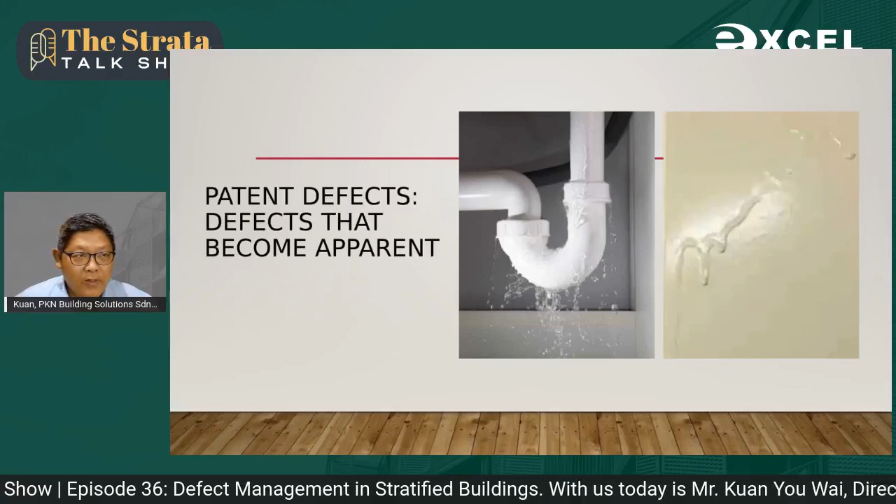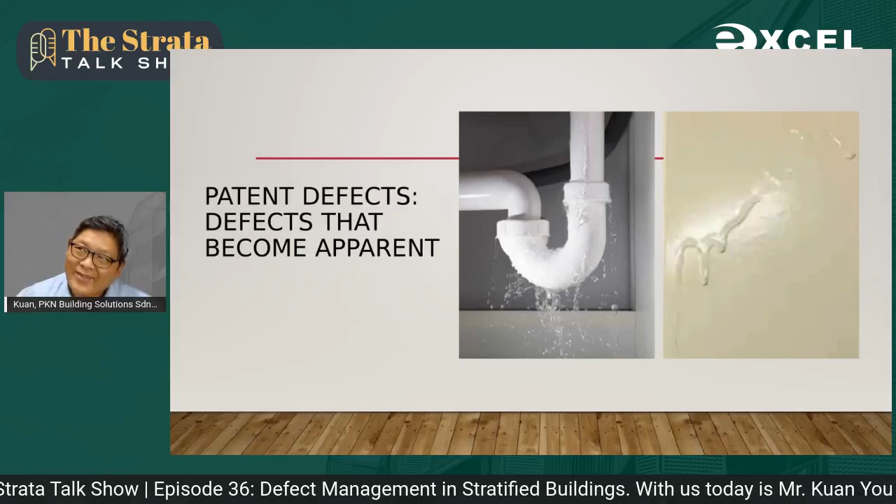Okay. Bear in mind, when you take your building during the vacant possession, the building actually comes with visible and invisible defects. So it is there since the first day. You need to understand this concept because some people misunderstand that during DLP we are only concerned about patent defects that become apparent. In fact, if you have a technology to dig out or discover all the hidden defects, they will eventually become apparent too. So that's the relationship between apparent and intangible defects or hidden defects. Okay, next slide.

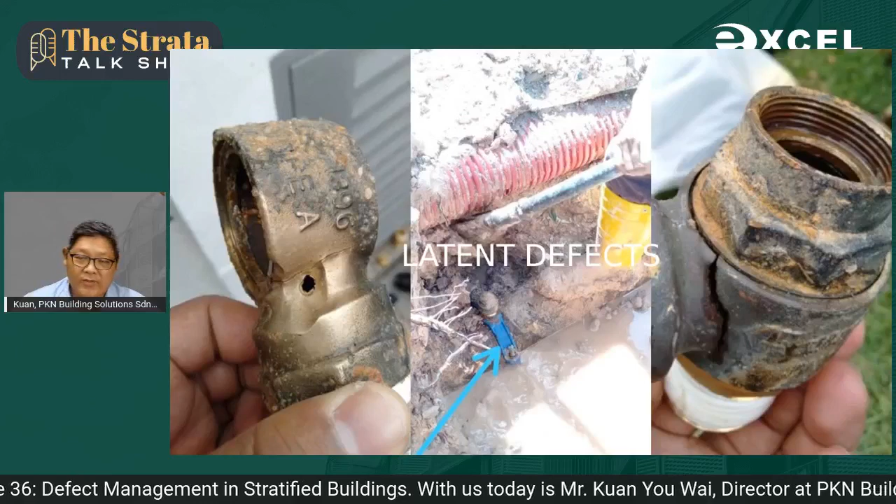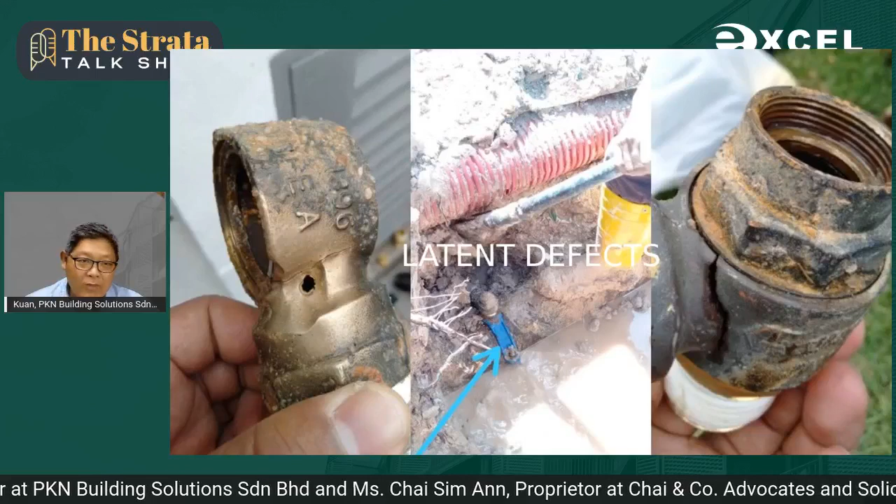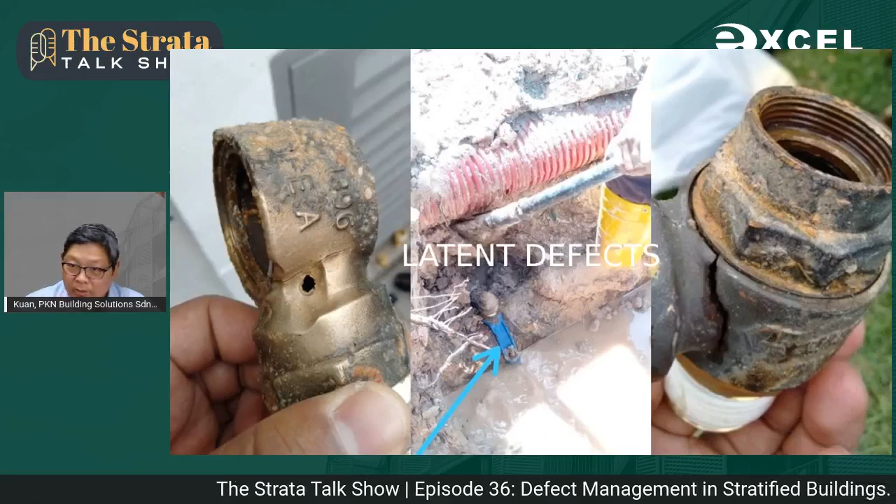So next slide. These are the hidden ones. The hidden one in this case is the defect that is actually concealed underground. This type of defect can only be discovered when the hole or the crack line becomes bigger eventually, and then it starts to burst. This type of defect normally takes time to develop, because the vibration due to the imperfection in the copper fitting can cause it to crack. And corrosion also takes time.

Look at the hole on the copper fitting. It is due to impurity causing it to have pit corrosion. So this type of corrosion needs time to develop. Okay, so all this, if there is any poor material, it needs time to develop. That's why it typically happens after DLP, after the first 2 years. So next slide.

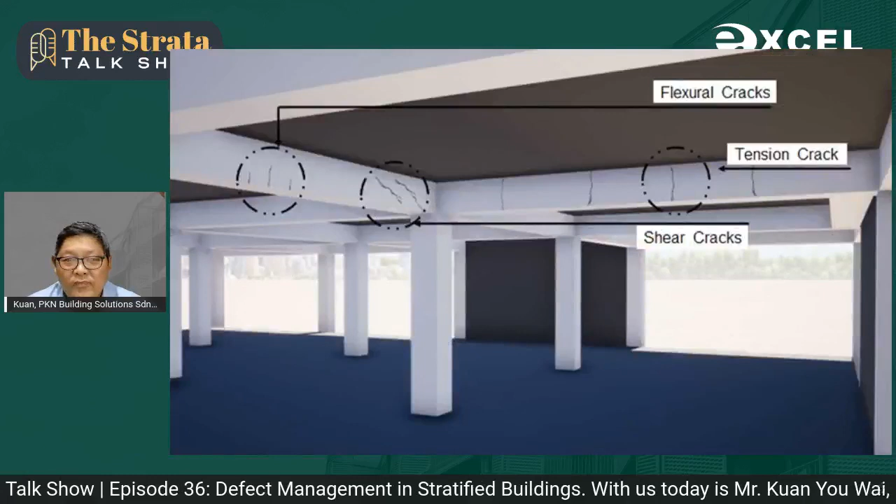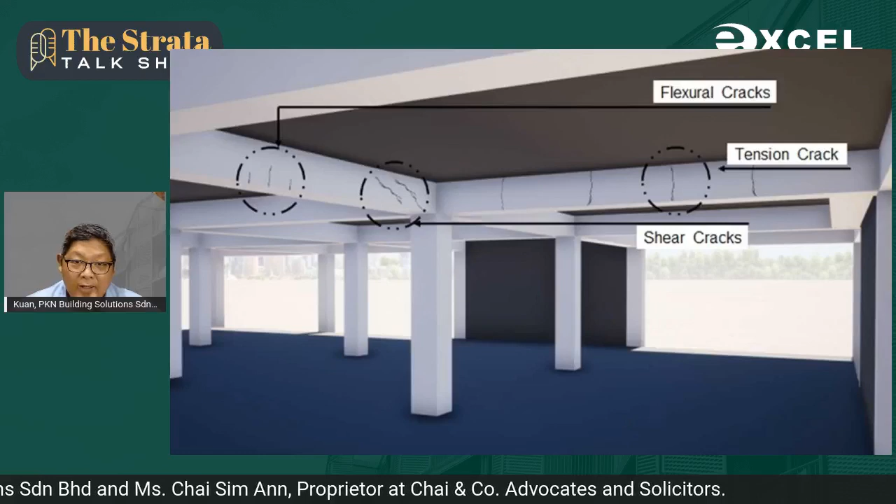Another type of latent defect that needs time to develop is crack. Not all crack lines are dangerous or of structural concern. Shear crack, the crack line at the edge of the beam diagonal that extends from the compression zone to the tension zone at both sides, means through crack. It's actually dangerous. Flexural crack is not dangerous, it's only limited to one of the zones, in this case the tension zone. But it still needs to be repaired.

It's not dangerous, except if it's bigger than the allowable threshold, which is 0.3 mm based on BS 8110 structural use of concrete. When it comes to tension crack, it is dangerous, so all these need to actually have structural concern.

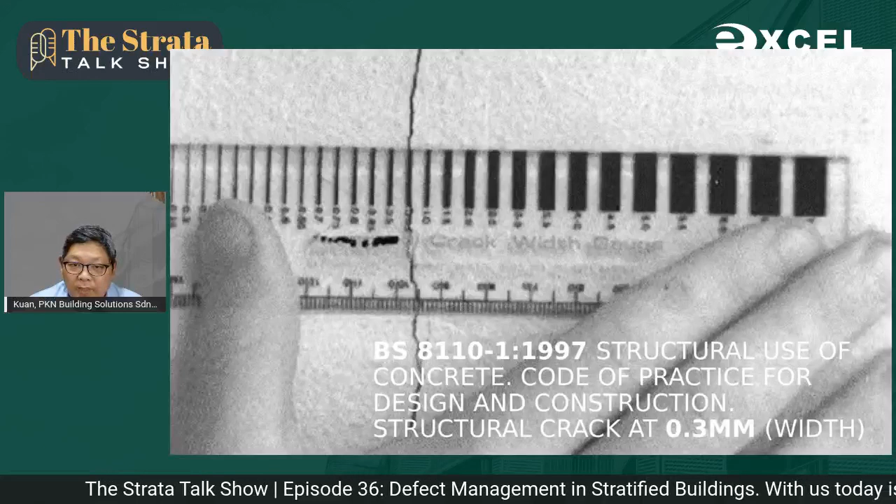BS 8110 allows crack but not more than 0.3 mm. Anything more than 0.3 mm on a structural element is known as structural crack, which needs attention.

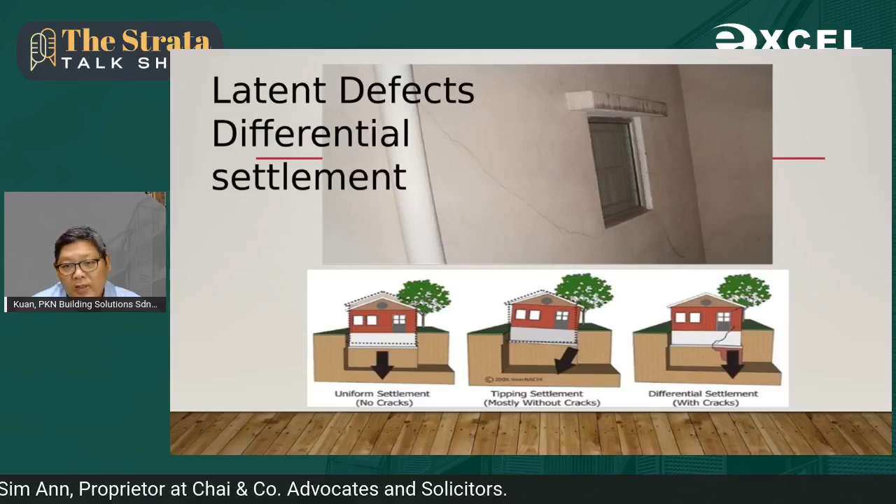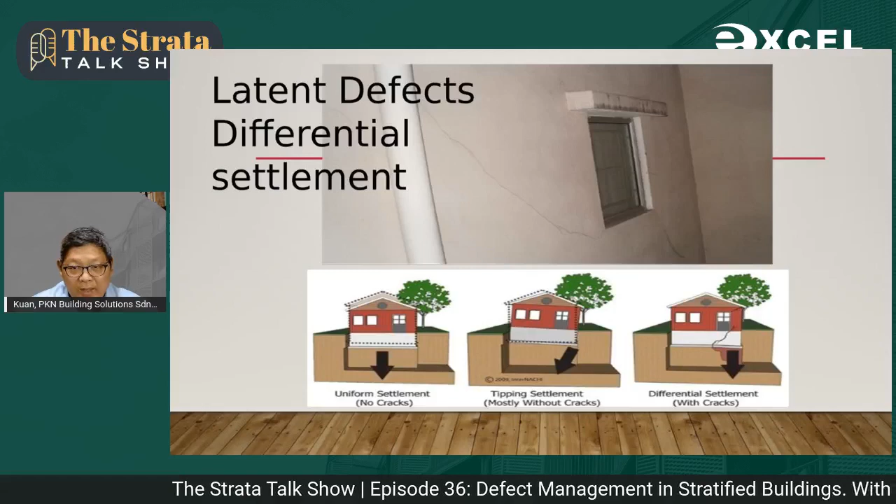Another typical type of latent defect is differential settlement, a crack caused by differential settlement, which is diagonal in nature due to one side of the foundation being weak compared to the rest of the foundation. This type of differential settlement is actually dangerous.

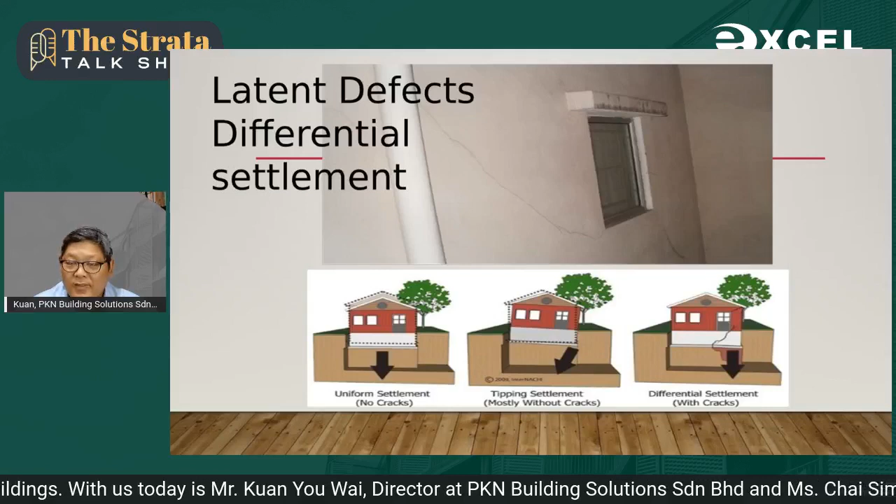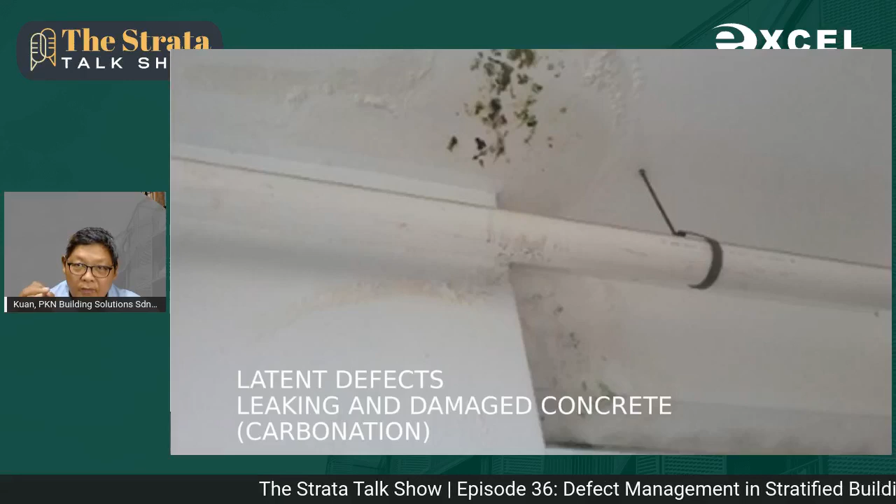Latent defect due to leaking. This type of leaking can cause the concrete to crack. One of the common mechanisms is carbonation, whereby corrosion of the reinforcement steel bar causes it to expand, and it keeps expanding up to 600%, causing it to crack continuously from inside. This is also a very common type of latent defect.

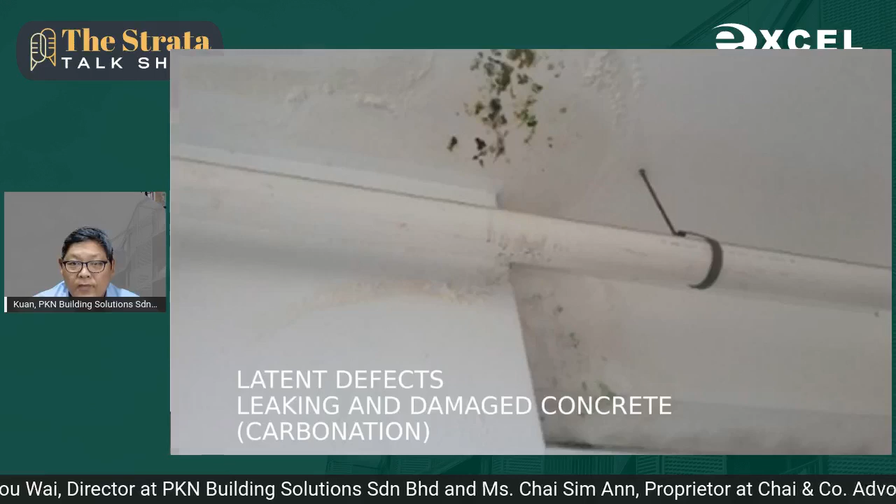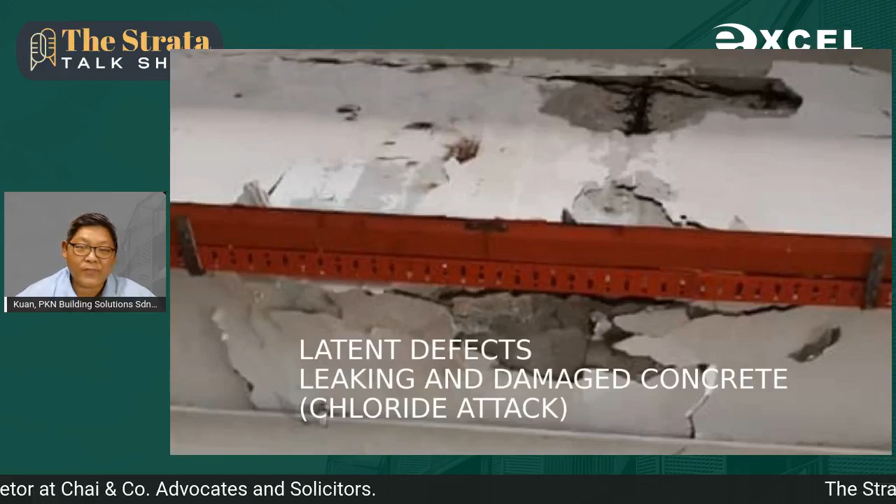Chloride attack. Chloride is available in our swimming pool, and it actually evaporates under the hot sun. I had the opportunity to collect a water sample on the swimming pool deck, and the sample actually had chlorine ions, meaning the chlorine evaporates from the swimming pool because it's 2.5 times heavier than air. It floats on the concrete deck, and when it encounters water, it becomes hydrochloric acid. This is the mechanism of migration of chloride to the concrete deck. When there is chloride attack, the corrosion can be accelerated because chlorine is an accelerator, or we call it a catalyst of corrosion.

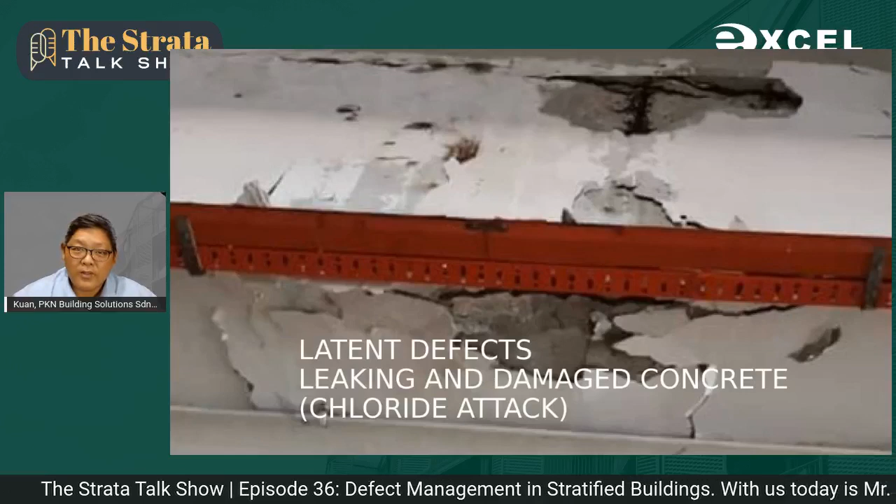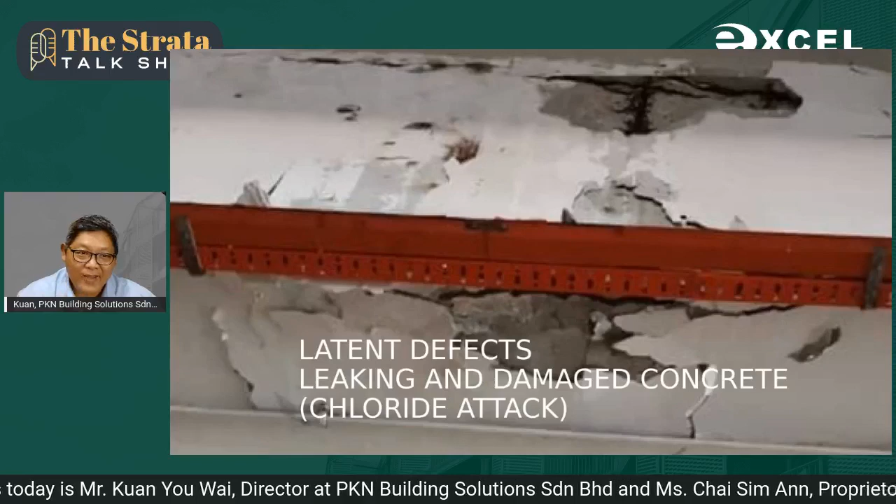In this case, a condo in KL, in Mont Kiara, was leaking for only 4 years and the beam actually reached a level of fatigue, near to fatigue, anytime it can collapse. So chloride is not something that we should take lightly.

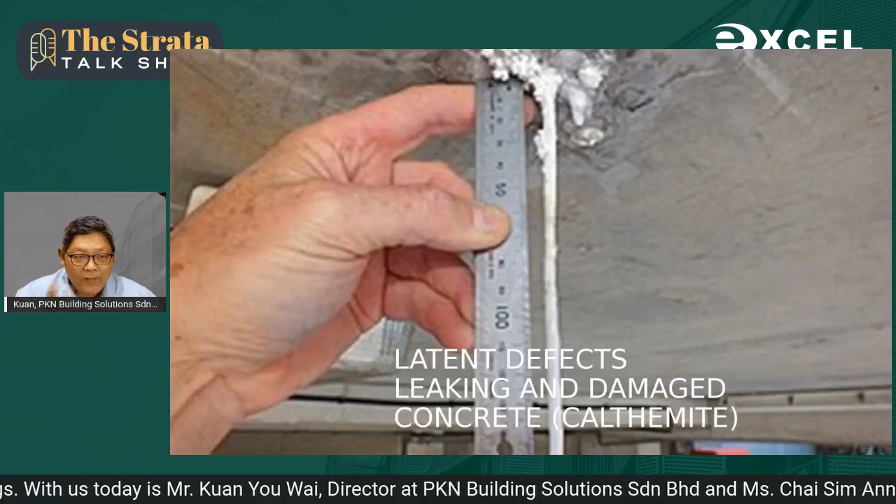If you have something like calcium sediment, like the Batu Cave stalactite and stalagmite, in layman's terms I always describe it that way. In fact, it is the dissolved soluble mineral from the concrete due to waterproofing failure. By virtue of that waterproofing failure, say from the flat roof or from the toilet, there is cyclic wetting and drying, meaning there is time for it to dry up. If the leaking comes from the domestic pipe, the water will rush out continuously and there's no time for it to settle and crystallize.

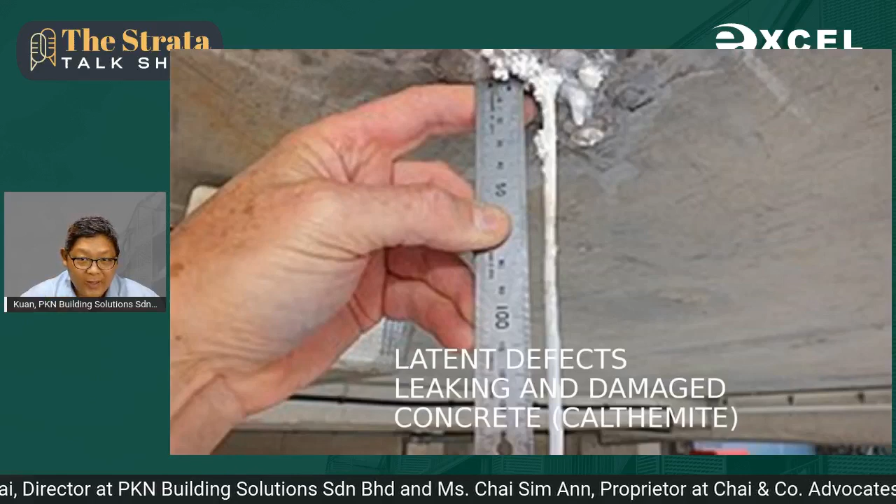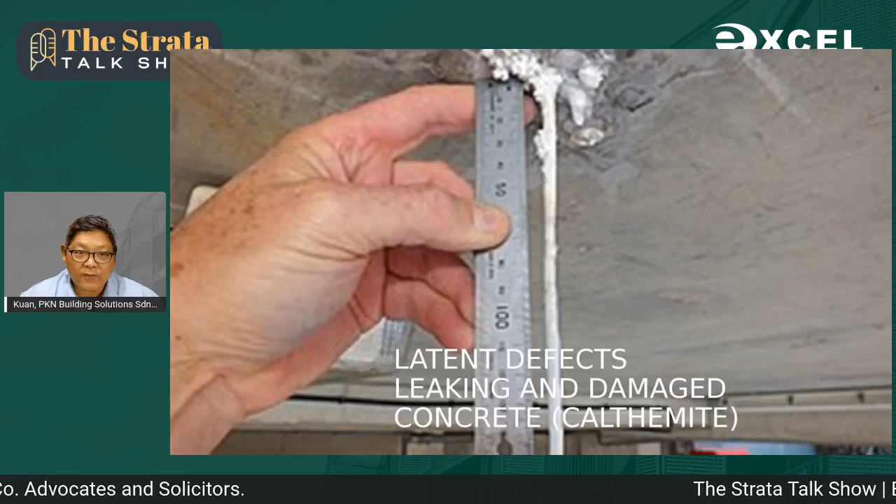In this type of case where you have time to settle and crystallize, there must be some form of cyclic wetting and drying, sometimes wet, sometimes dry. So when it's dry, it has time to form the sediment, and it is an indicator of waterproofing failure. This is also a form of latent defect, and the calcium deposit that drips onto the floor is actually slippery and dangerous to human traffic.

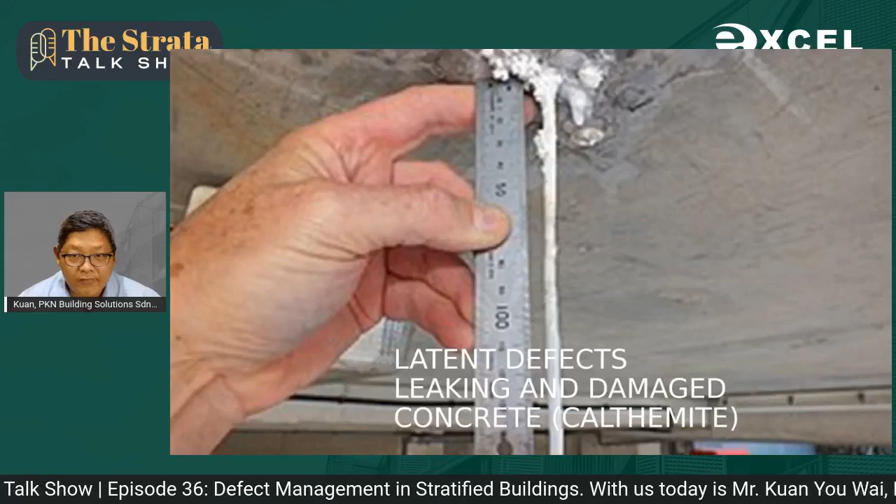Another typical type of latent defect I would like to show you is due to poor workmanship. In this case, this is actually a real case in Putra Heights.

I look at the spot because sometimes water creates a damp spot which is a bit dark in color. How do we verify that it is actually dampness? We use a moisture meter like this.

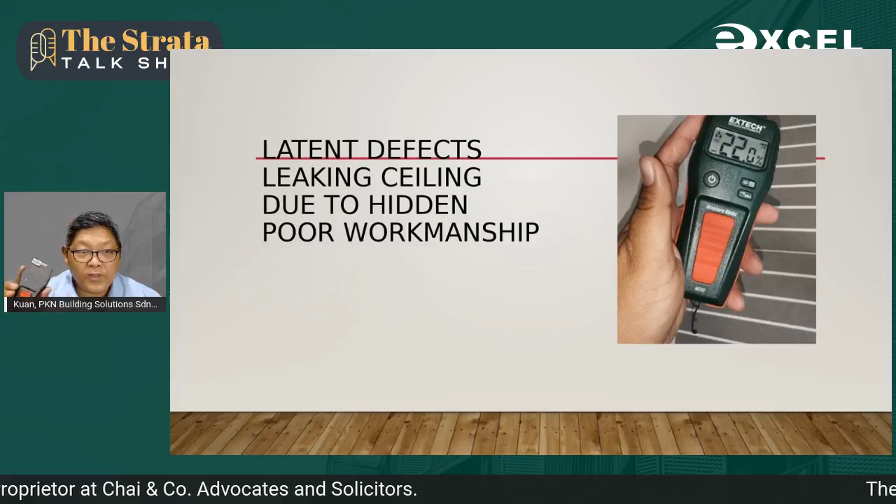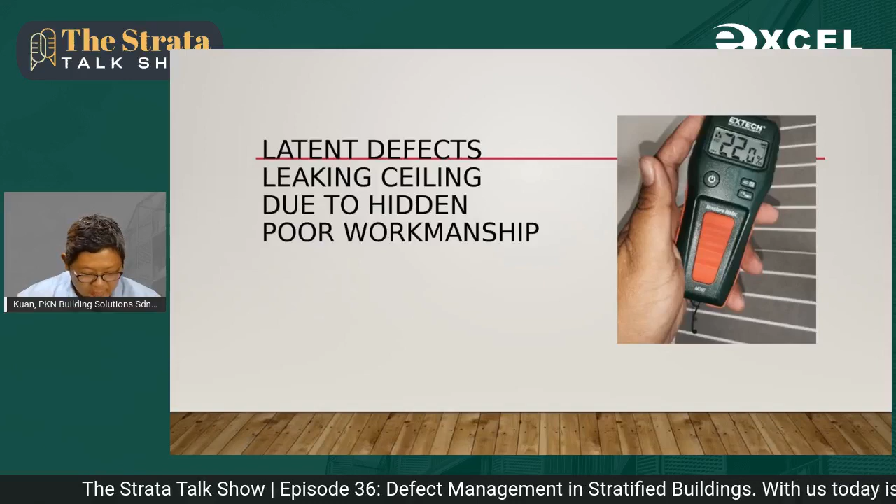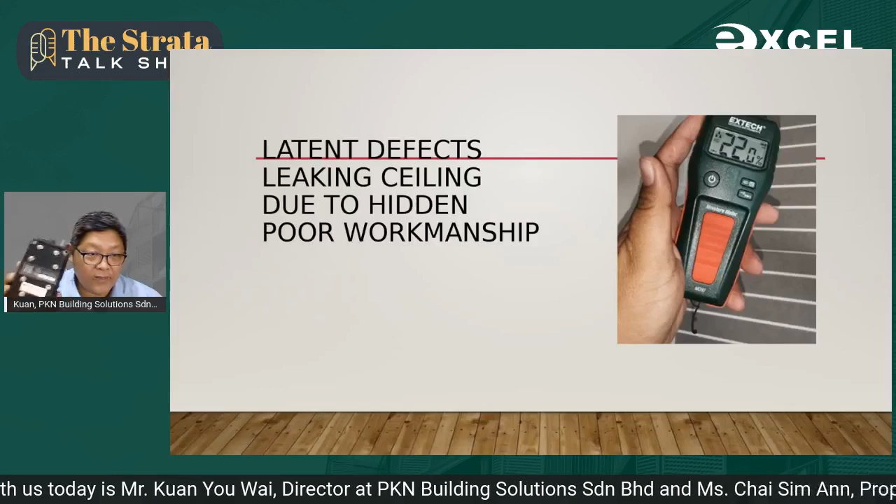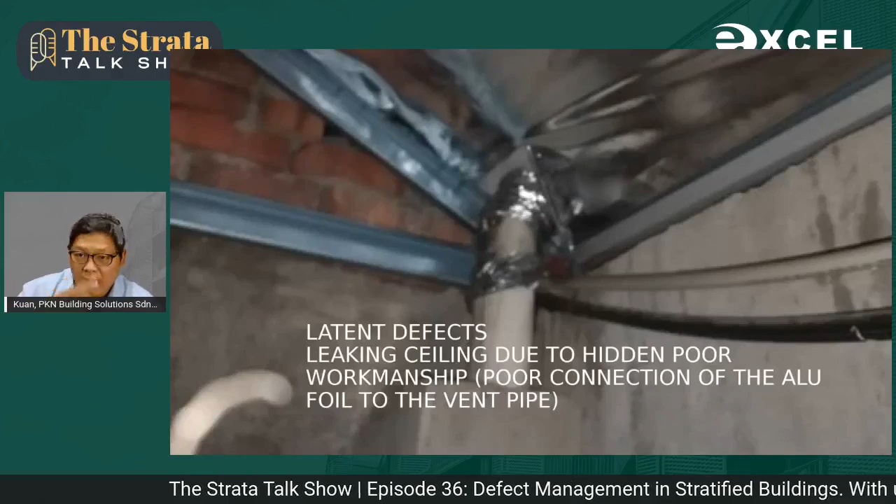So I used a moisture meter to measure the damp spot, and it was confirmed damp. Then I asked my worker to climb up to the ceiling, and we discovered the aluminum foil had been poorly installed, and whatever water seeped through the roof tile ended up at this location. That's why it went to the pipe shaft, the pipe riser, and ended up at the floor below. So this is another type of hidden defect due to poor workmanship, because even an engineer or surveyor who inspected the building during vacant possession would most likely be unable to discover it, since this is quite a hidden location.

When it comes to who is the expert - according to Section 45 of the Evidence Act 1950, experts are people who are specially skilled. I need to bring your attention to the point that if we suspect material failure, we need to bring in material scientists. When we suspect workmanship failure, we need to bring in the specialist tradesman who has experience handling the work himself. Lastly, when we suspect design issues, then we need to hire the designer.

But bear in mind, when we come to court for the purpose of proving a latent defect, we need to prove causation. To prove causation, there is another part of the law known as Order 40A, Rule 3, Rules of Court 2012.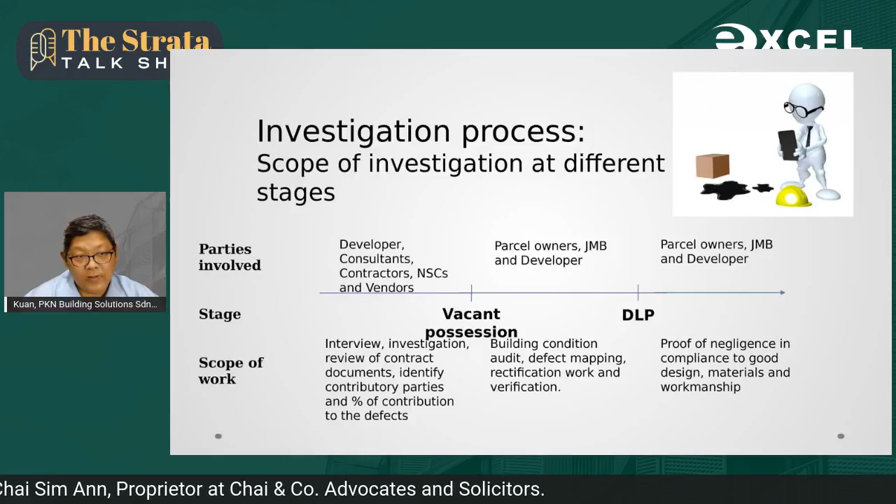So just to give you a scenario: the 15 years time bar, defect liability period, and after defect liability period. During defect liability period, if you fail to identify the defect that becomes apparent, you lose your right to claim that defect. But such clause doesn't limit your right to claim a defect which is not apparent. So for all this, if it is due to construction negligence, it always starts at the first day of vacant possession. So, yeah, there is an implication of it.

For whatever inspection or investigation that we do, we need to identify the deviation, any differences from the approved drawing, any deviation from the standard that a reasonable workman, engineer, or contractor should follow, and then determine the condition of the design and workmanship, as well as conditions that need further investigation.

During the investigation process, you need to understand that for negligence, the standard of proof is balance of probability, meaning you must convince the court that whatever you prove, whatever fact you bring in, is more than 50% likely to be correct. That is the meaning of balance of probability.

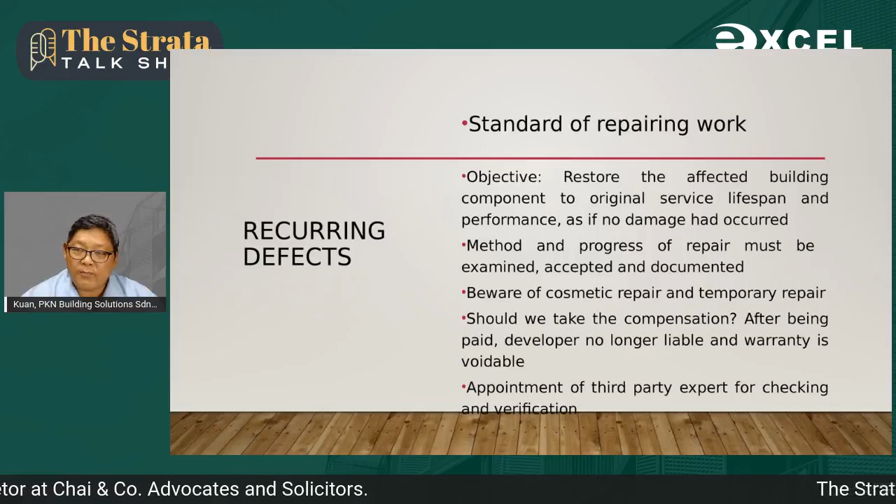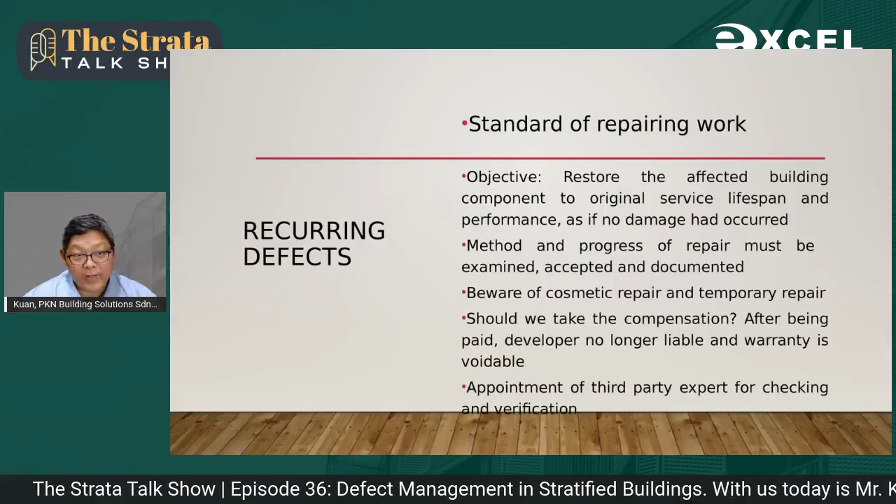Recurring defect, as Ms. Sim Ann has mentioned, is the defect that has been reported during the defect liability period but not rectified correctly. This typically has a 6-year limitation, but it really depends on how you word your claim. Bear in mind, as I mentioned, when you receive the building during vacant possession, it actually comes with defect that is apparent and hidden or latent defect. So it really depends on how you argue your case.

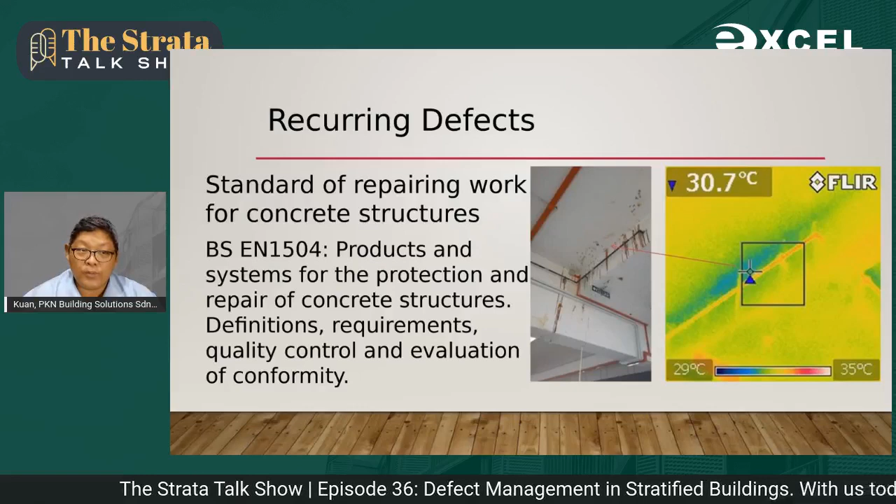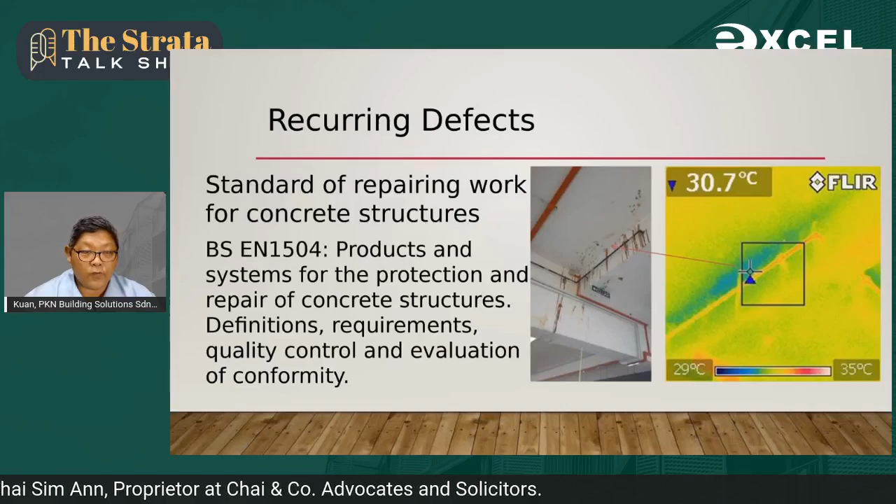I urge the audience here to beware of cosmetic repair that doesn't address the root cause. KPKT recommends EN1504, a product and system for the protection and repair of concrete structures, which attempts to repair the building holistically and scientifically, to return the structure to its original performance level and original service lifespan. So I urge you not to accept cosmetic repair, but try to apply EN1504 whenever the defect concerns structure.

And for a recurring defect, is the avenue for recourse the tribunal or the court? So it will depend on the jurisdiction of the tribunal, which is 24 months only. Okay, sorry, 24 months only. And then secondly, the amount, the quantum of claim.

In fact, looking at the type of latent defect that I normally come across, most of them need to be handled by the court, need to be filed in the court. So when it comes to court and you are a personal parcel owner, the litigation cost and the expert witness cost may not be affordable to many, so class action is a more feasible way. Next slide.

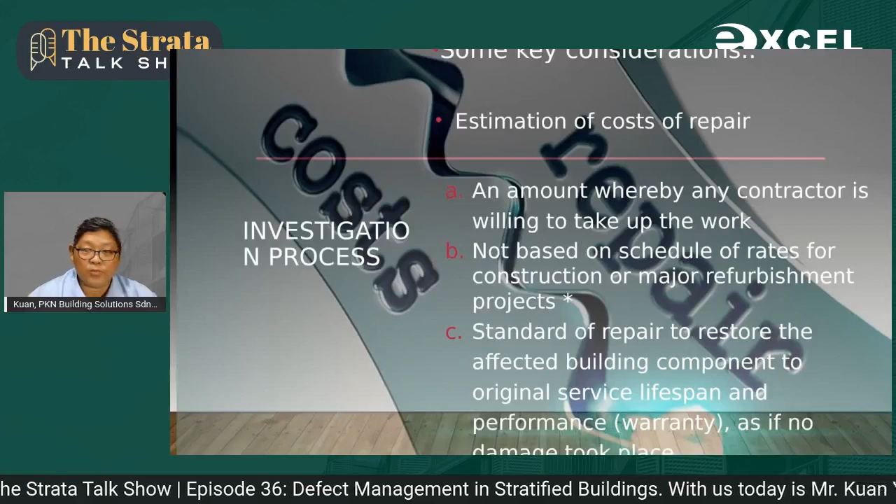So when it comes to investigation, whatever claim is awarded, it must be able to repair the defect in a good manner. And if, let's say, someone refers to the JKR schedule of rates, for JKR 100,000 is a small project, but a defect only costs a few thousand or more than 10,000. There is no economy of scale that can make us comply with the rate of the JKR schedule.

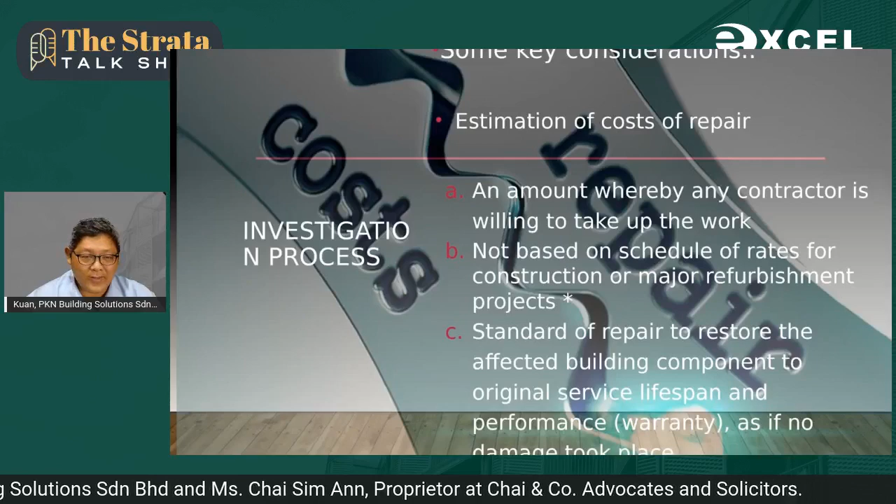So this is actually very dangerous, especially when it comes to the technical report from the tribunal, because the tribunal actually takes the JKR schedule of rates, and I would urge you to challenge it with quotations so that you are not aggrieved by the system. Next slide.

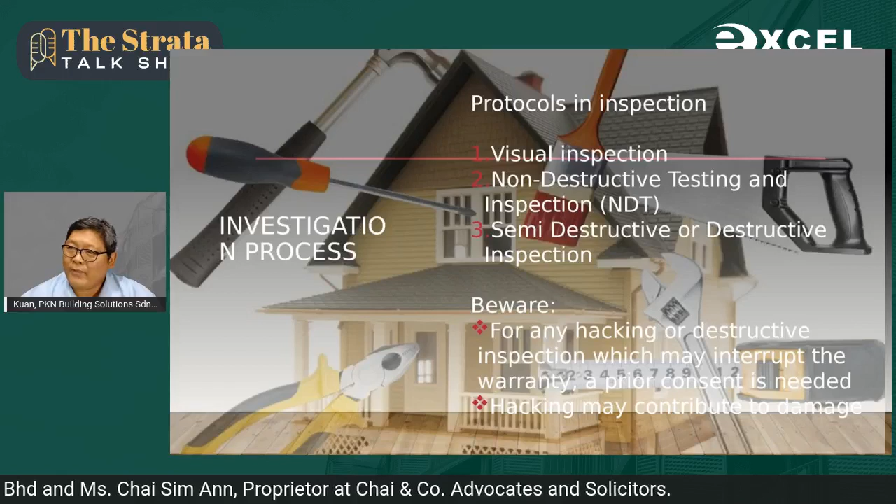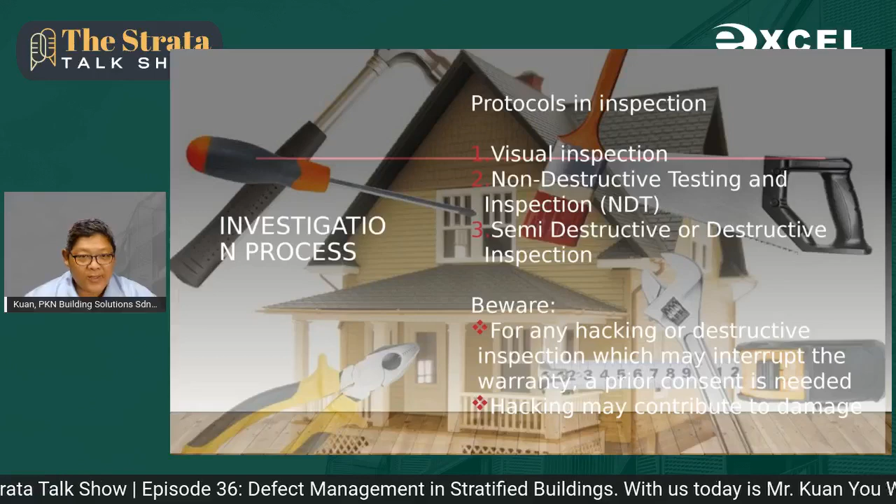But in many situations, even non-destructive testing has its own limitations. In some situations, we actually need to dismantle or hack the place, but whatever we hack or dismantle, we must document it properly and do it with due care, so that it doesn't create another defect. Okay? So bear in mind, when you hack, you need to hack carefully, slowly, and gradually. Next slide.

And then of course, for visual inspection, there are references like QLASSIC, CPDS 101 or the JKR standard. But as I said, it depends on which stage of defect management you are referring to. For the DLP period, it's acceptable. Next slide.

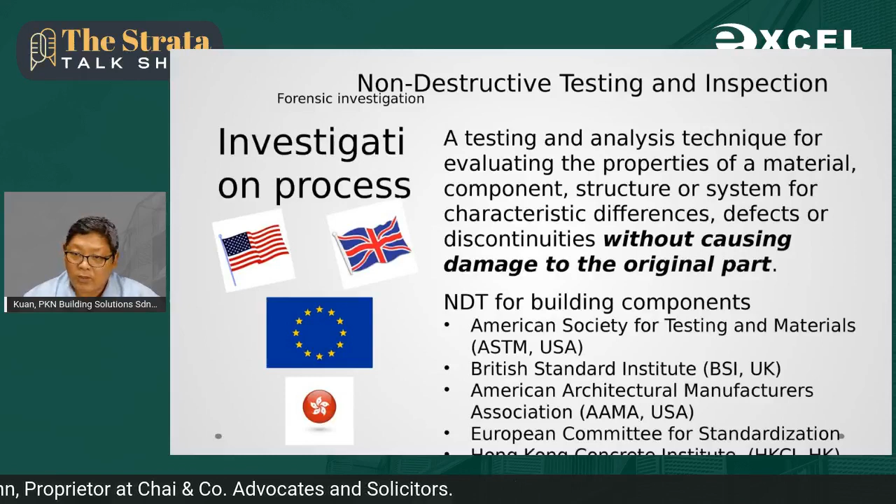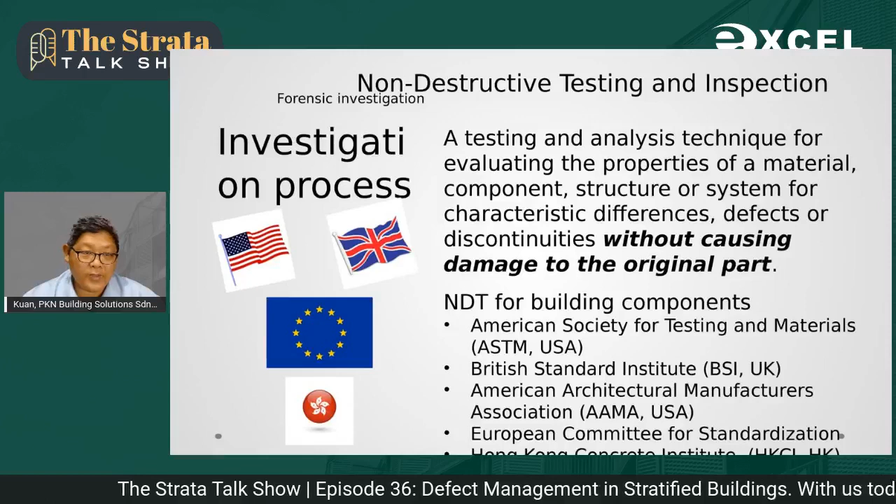For non-destructive testing and inspection, there are a lot of standards from America, Europe, as well as Hong Kong, and some of them I have listed here. The American Society for Testing and Materials has tons of testing literature and testing standards. British Standards also carry a lot. The American Architectural Manufacturers Association has specific forensic tests for fenestration. And European Norms and Hong Kong standards carry a lot of other standards. Next slide.

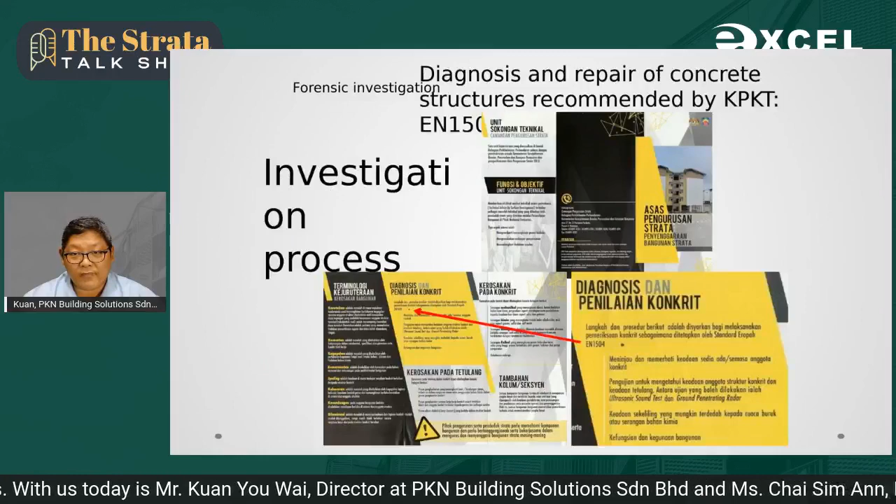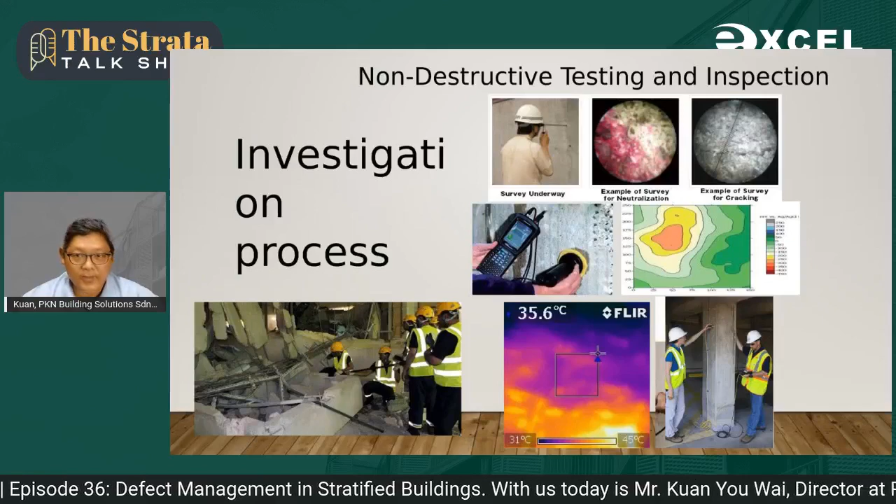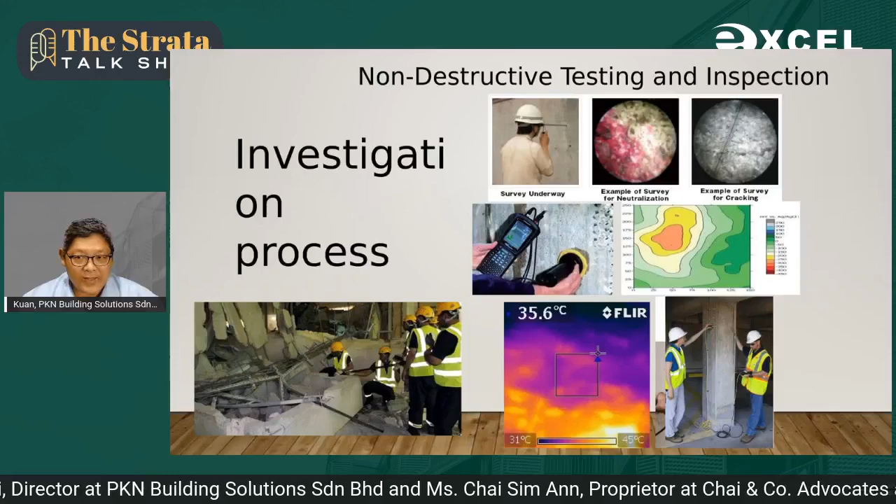And KPKT recommends EN 1504. EN 1504 prescribes a list of diagnosis as well as repair methods that harness scientific non-destructive testing methods. Next slide. These are some of them: phenolphthalein tests, endoscopic inspection, half-cell corrosion mapping, or even the impact echo method, infrared imaging. All these are the typical non-destructive testing methods prescribed in EN 1504. Next slide.

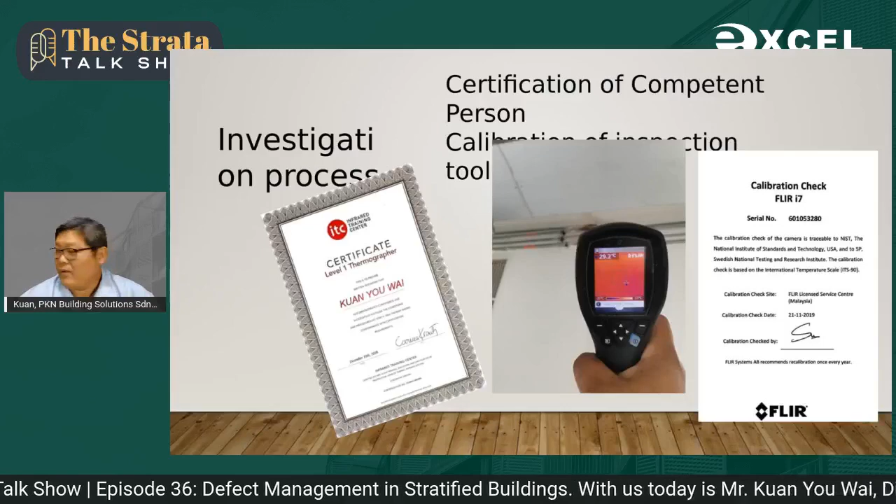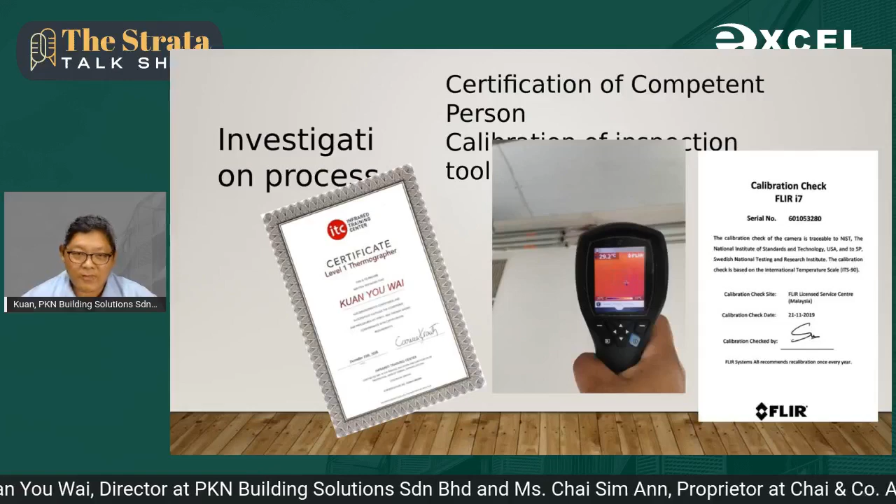And whoever does the inspection must be competent. The equipment must be calibrated. No calibration, no talk in the court. Your report will be thrown out. Even the slightest thing like a caliper needs to be calibrated. The moisture meter needs to be calibrated. Look at my moisture meter here. It has been calibrated, even the pin type. Whatever we use must be calibrated. Even the rebound hammer must be calibrated. Next slide.

So our job is like an investigator. Investigators that are so good at peeping at people. We even have equipment like the endoscope to peep at people, or, not to say peep at people, to inspect narrow spaces with this type of camera, which has been projected in my slides. Okay, camera. Next slide.

So for, let's say, a roof, we actually need to dismantle it. When it comes to court, we have to be factual. The judge will ask me: is this your opinion or is it a fact? Opinion is not accepted in the court. So things like suspect, or general descriptions like all or every, are not accepted in the court. So try to avoid all this, and try to limit your testimony to the area you are specialized in or have expertise in. If you are not a material scientist, try not to testify in areas you are not specialized in.

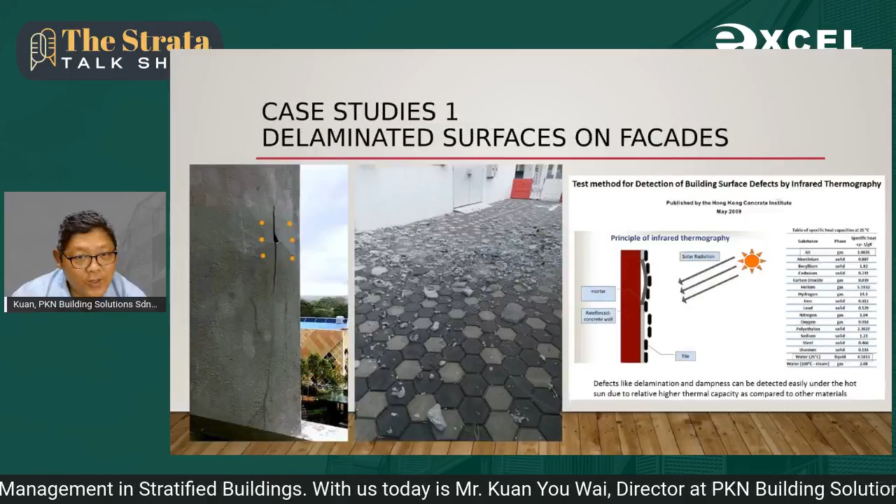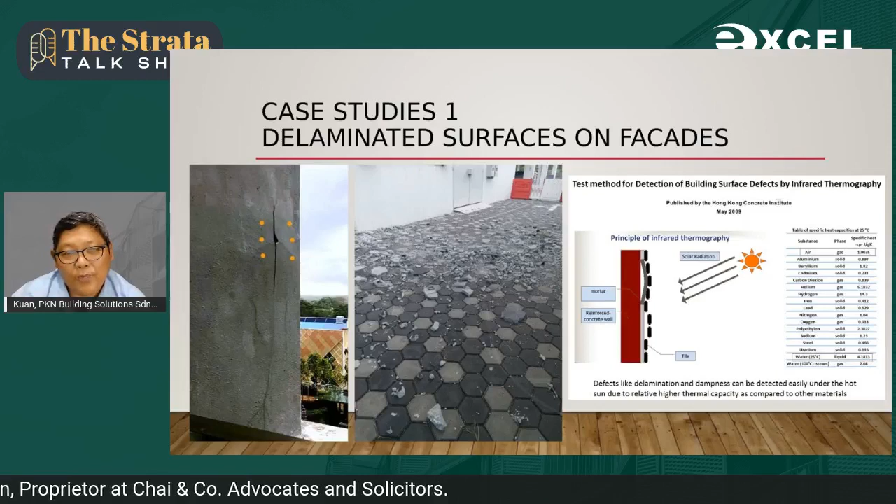So I'd like to share some of the case studies with you. This is a case that I personally handled. Delamination that caused the road to have so much splashing debris. And I proposed infrared imaging, because under the hot sun, the delaminated surface with a layer of air or water will become hotter. Next slide.

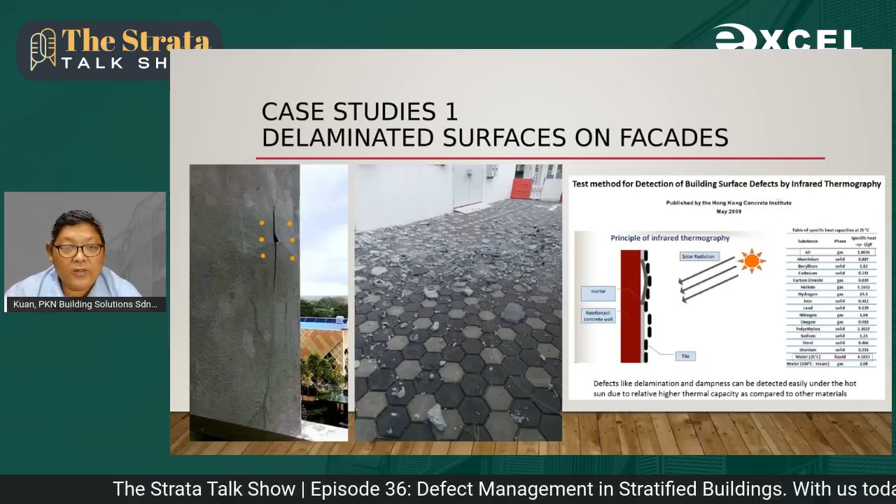So I flew an infrared drone. I can identify the hotspot easily, as well as identify the potential area that will soon have delamination. So this will justify whether a thorough replacement should be done. So with infrared imaging, it can be done, even to identify the potential area with problems. Next slide.

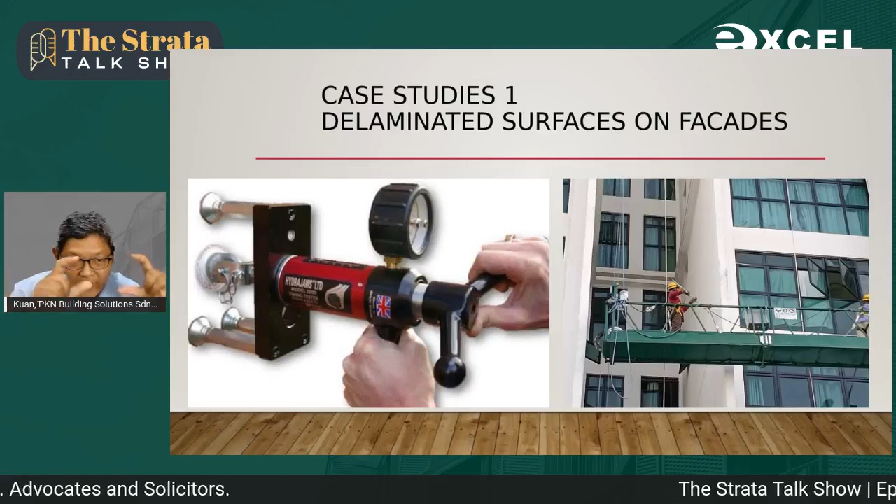And of course, we will do pull-off tests to justify the strength of the bonding of the cement strip to the surface, as well as close range inspection. We actually do a knocking test on every square meter of the wall, so that we can map out in 2D. Every box on my paper represents 1 meter square, and I can calculate how many percent has delaminated. Next slide.

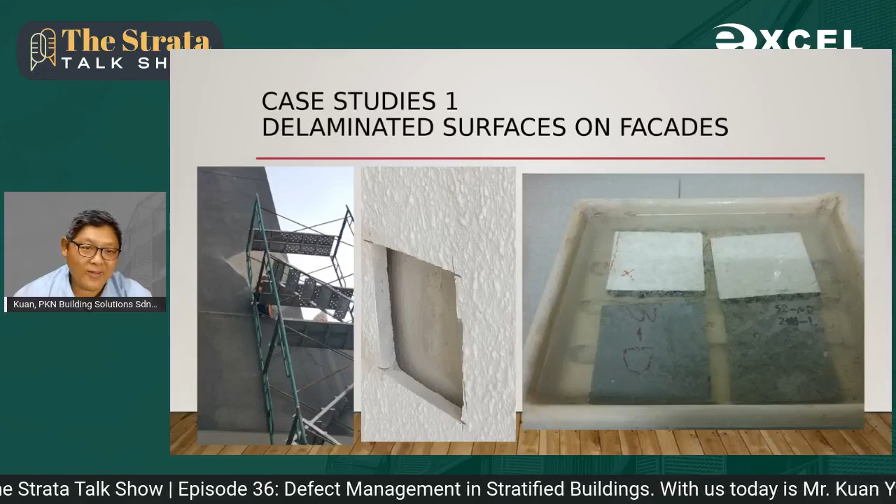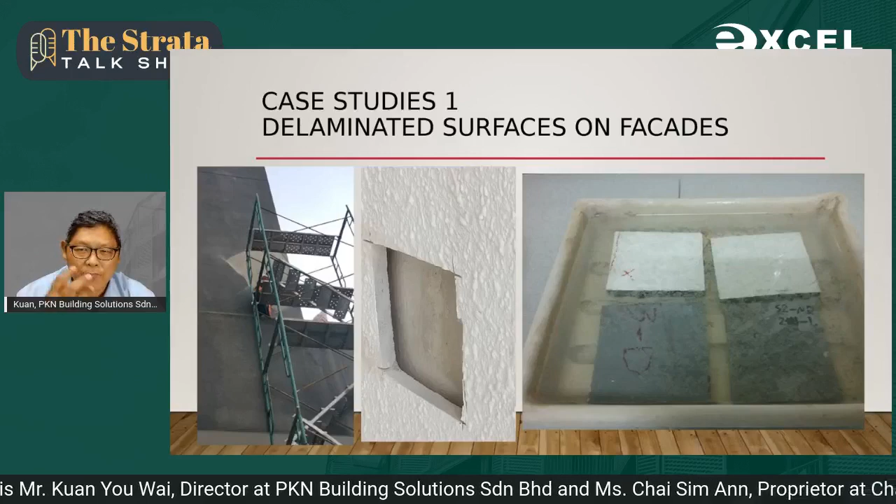And of course, we also take samples from the site, samples from areas with delamination as well as good bonding, no problem areas. So we did this water absorption test, we did a composition analysis test, and we discovered the material is good. The problem is lack of surface preparation, as well as different thickness. So this is what the judge will need for making a decision. So we must present something factual based on the lab from an accredited laboratory, as well as concrete material scientists. Next slide.

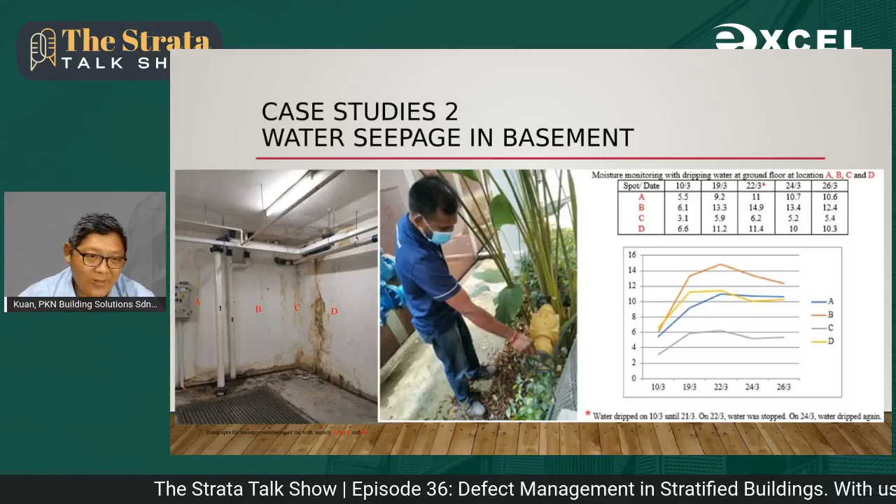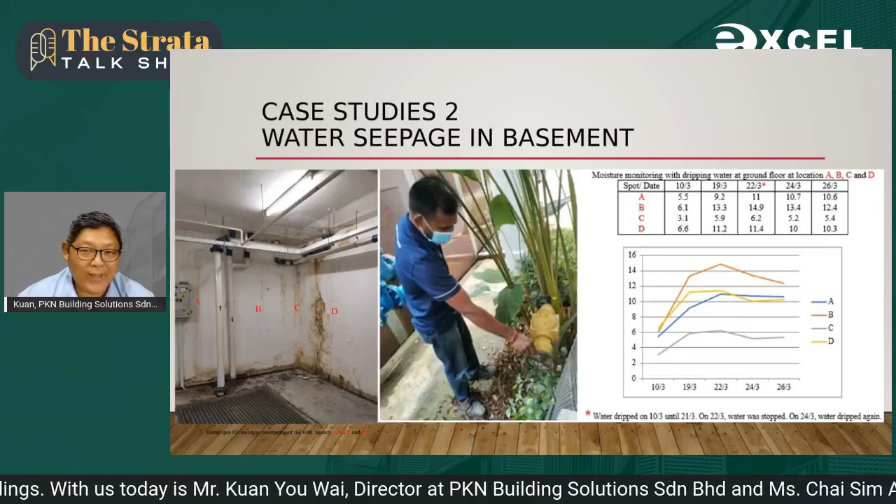Then I'll plot a graph, and actually one day I discovered the moisture level dropped. So I went up to see someone had shut down the hydrant fully, no water drip, so it dropped. So I turned on the hydrant again, and it increased again. So this is another way that we prove that it's due to the surface water and waterproofing failure of the basement. Next slide.

And of course, the defendant will come up with all types of things to say. They will pinpoint everywhere so long as they don't pinpoint themselves. Okay, so as a result, we must take precautionary action to investigate all the pipes. If possible, if pressure gauge testing can be done, we'll do that as well. We use infrared imaging to confirm that it's not due to the pipe.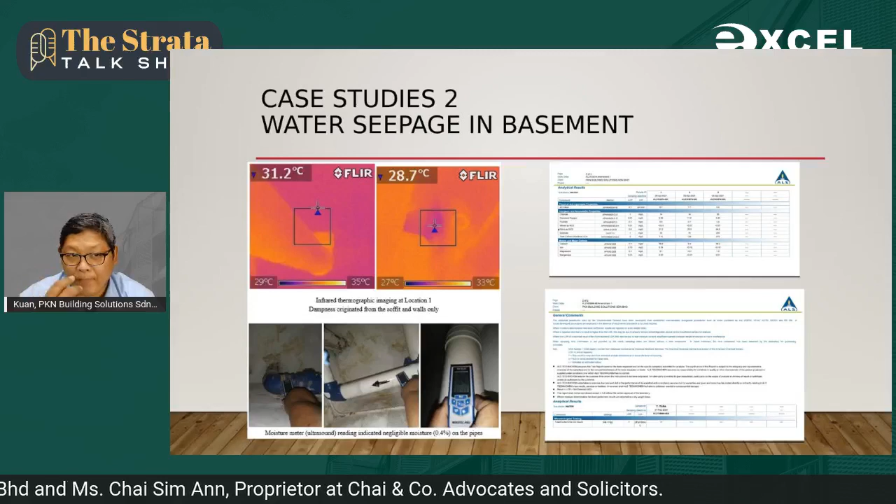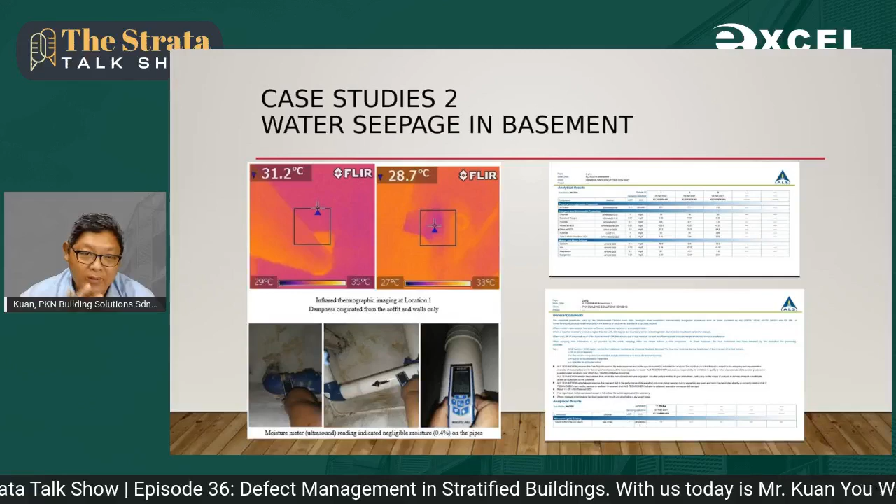Use a moisture meter to confirm all this, and we can also take a water sample to send to the lab. If it comes from rainwater, the chemistry component is different. If it has E. coli, it can actually come from wastewater due to waste pipe leakage. So these are all the methods that we can use without damaging anything. Next slide.

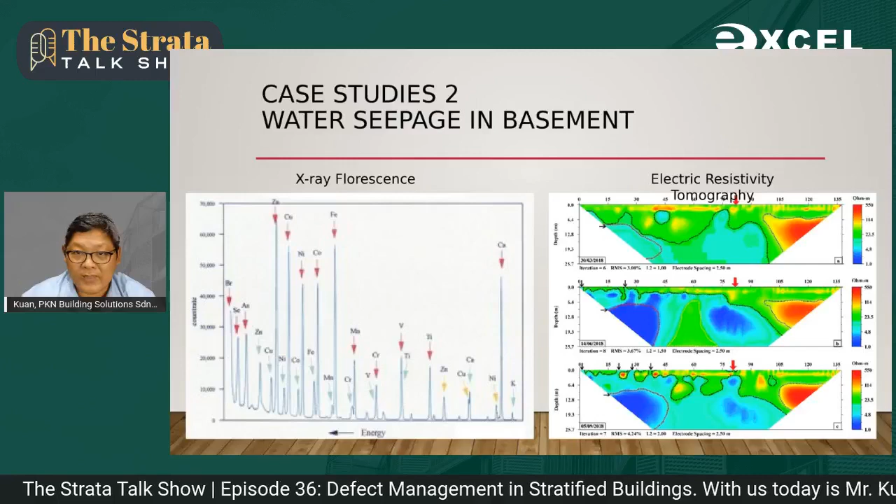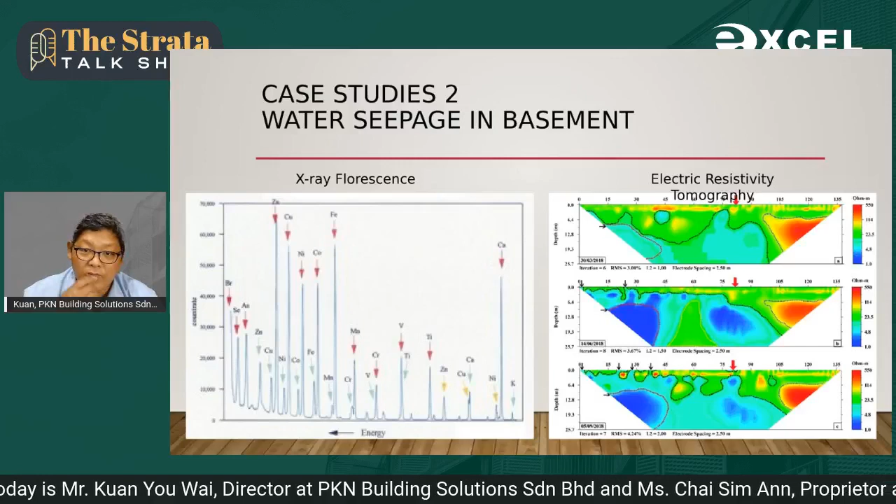Of course, we can send the water sample for X-ray fluorescence analysis to analyze the water sample into 84 types of minerals. And I will hire water scientists and geotechnical scientists to help me interpret the findings. From their credentials as well as expertise, they can tell me what type of water it is. And nowadays, we even have electric resistivity tomography that can scan the floor at a depth of 15 meters, around 50 feet, to see the soil profile as well as the groundwater profile. That can also help me to prove. The more proof, the merrier. Next slide.

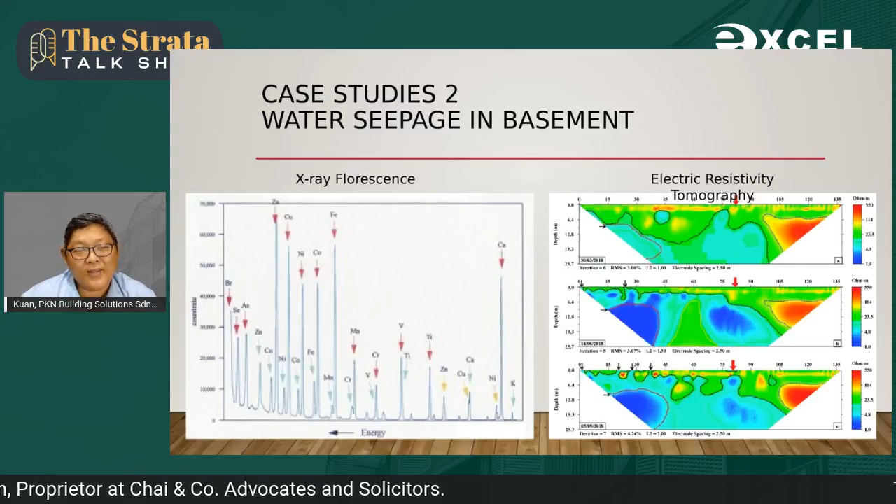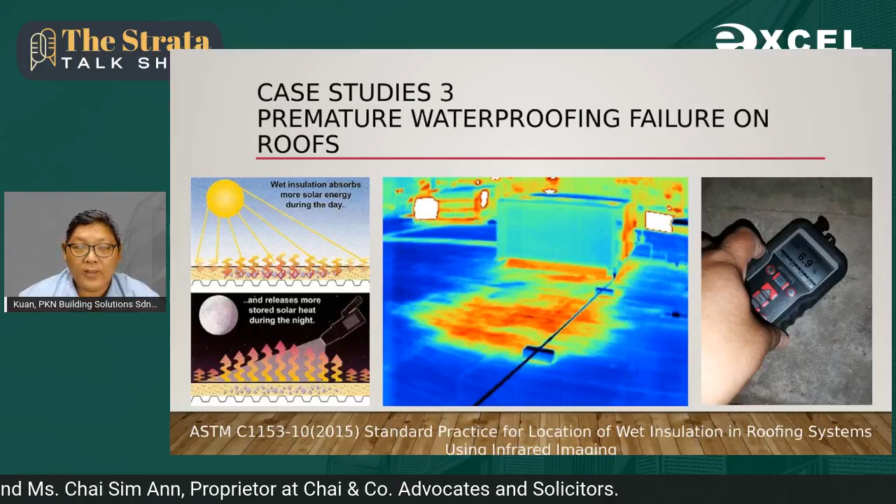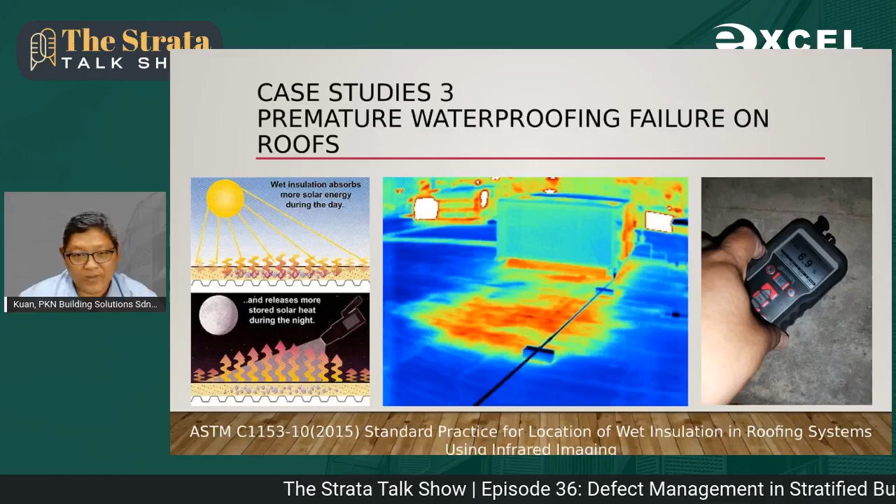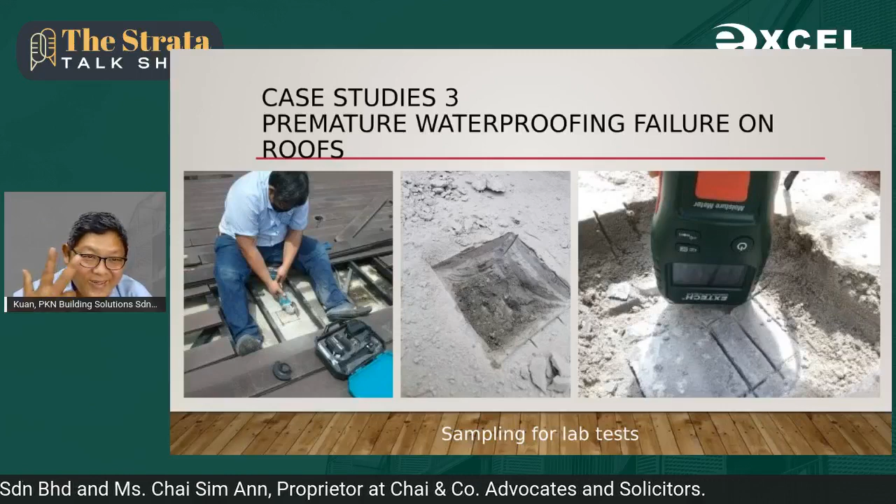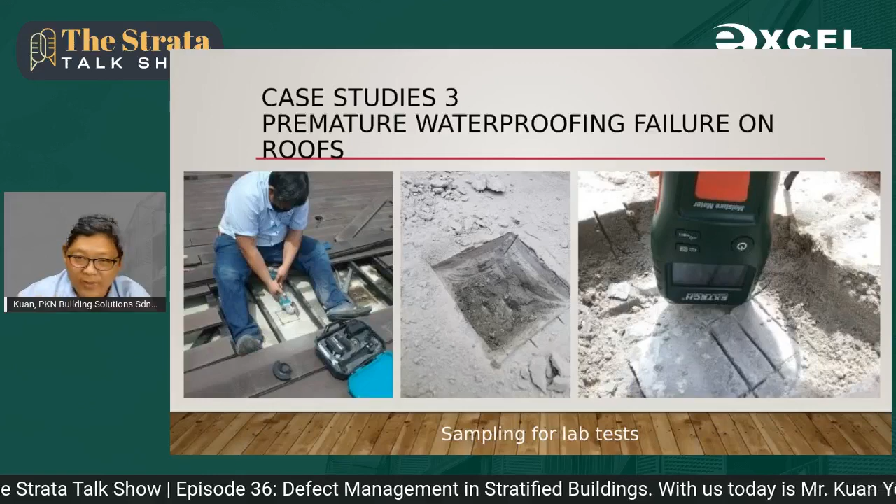I will need to remove the cement screed. And in this case, I was assigned to check 8 locations. Of 8 locations, 3 didn't even have waterproofing. Okay, how severe is the case? 3 locations, no waterproofing. I have won the case now, in short. Secondly, I used a diamond cutter to cut the 5 locations that have waterproofing, cut it like a tofu, and then I used a chisel to remove the waterproof membrane. Next slide.

After that, I send it to the lab to measure the thickness of the waterproofing, because the thickness is an indicator of workmanship quality, and the thickness varies substantially. So workmanship fail. And then we also do similarity tests for waterproofing material of the same family but carrying 10 years warranty. So my polymer scientist actually requested me to get some fresh samples from different manufacturers, and we did a similarity test using Fourier transform infrared technology.

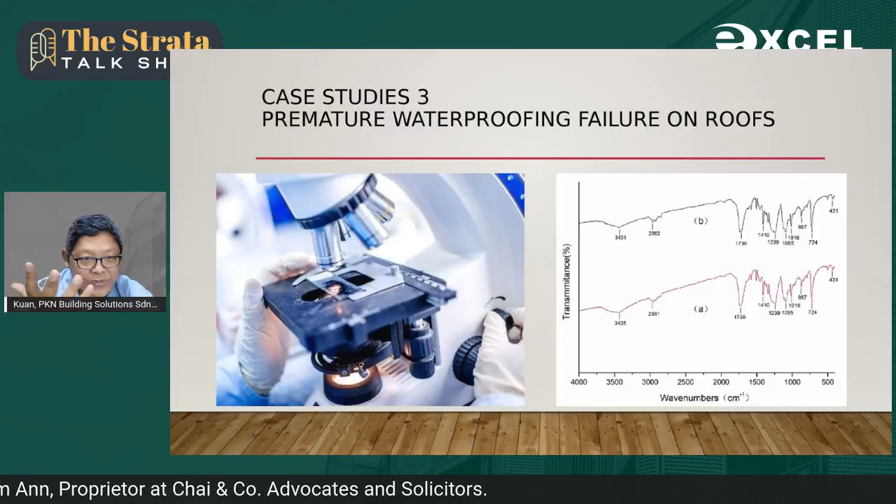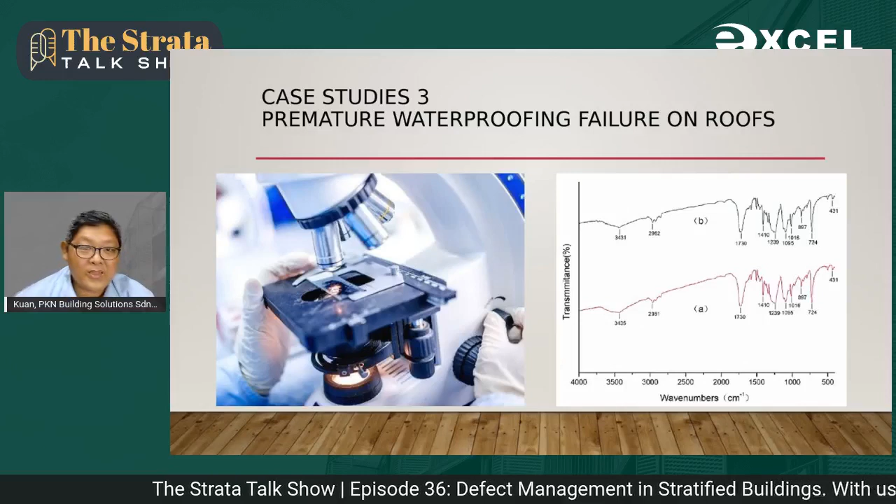The technology identified the performing ingredients of the good sample and the sample that I extracted from the site. And by this, we discovered it is only 20% similar. So even the material also fails. So this is the solid type of evidence that is needed in court in order to prove the causation.